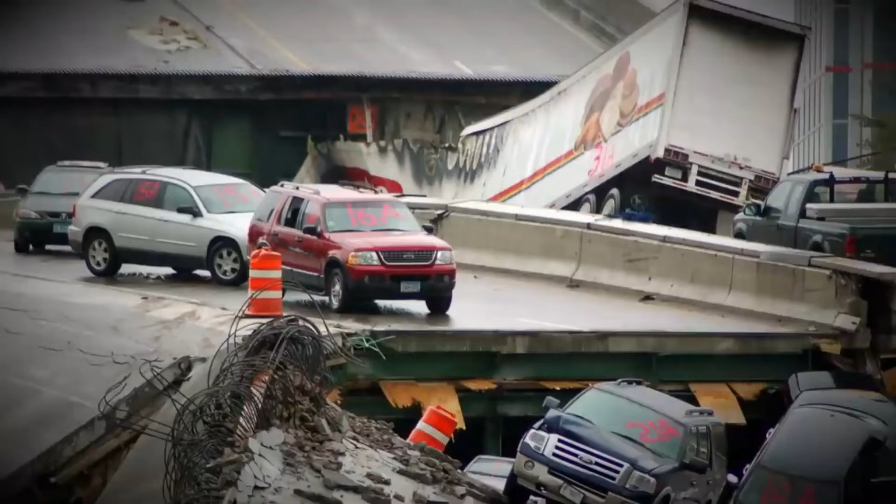Today we're covering the Mississippi Bridge collapse, and as such I'm going to rate it here 6 on my disaster scale, and again here 6 on my historical legacy scale.

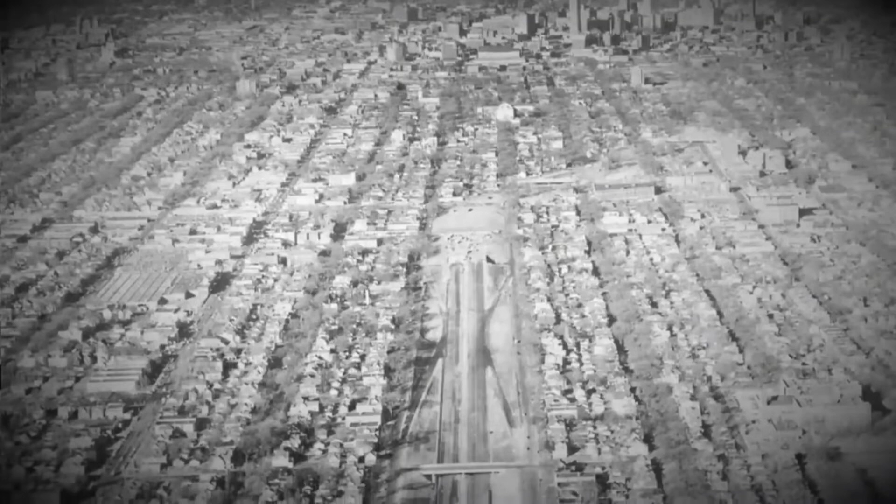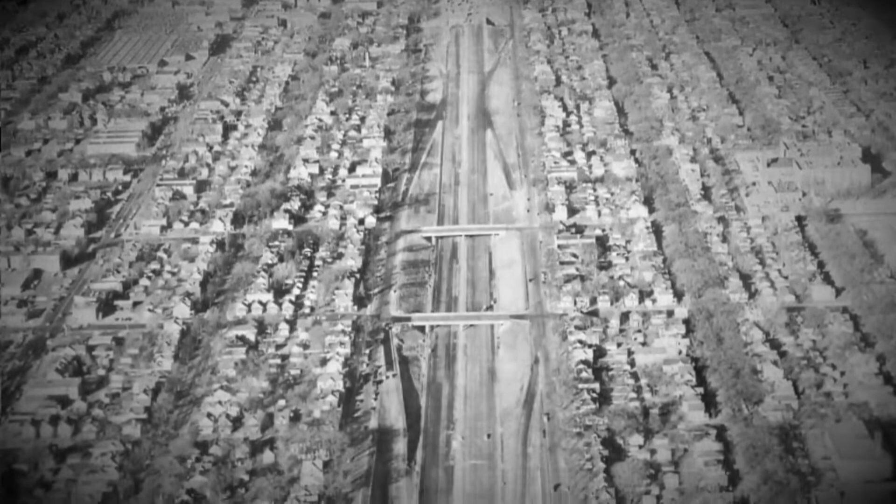In the early 1960s, plans were drawn up to cross the Mississippi River as part of the colossal construction of the I-35, a monumental 1,569-mile north-south cross-country interstate highway project. Parts of what would become the I-35 had been constructed pre-1956, the date on which the interstate system was formed

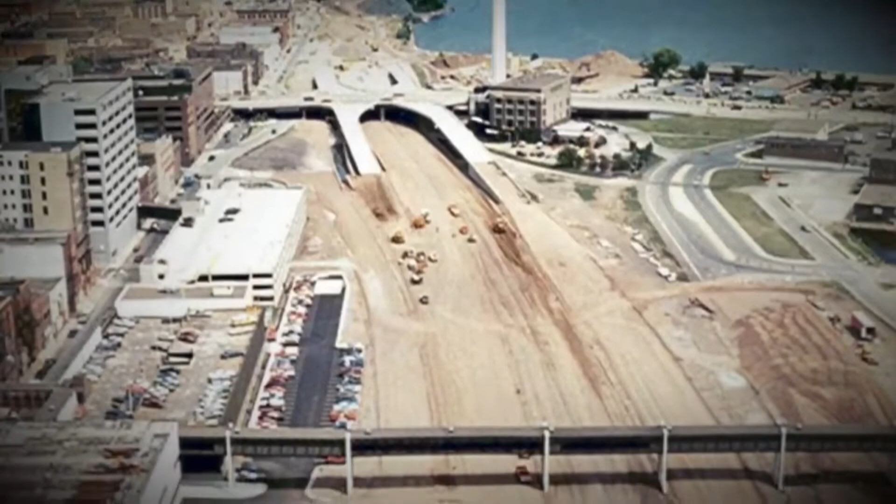in the US. The route would eventually be completed in 1982, and it ran from Minnesota in the north all the way down to Texas in the south. And part of the route would have to travel through Minneapolis, necessitating the crossing of the Mississippi River.

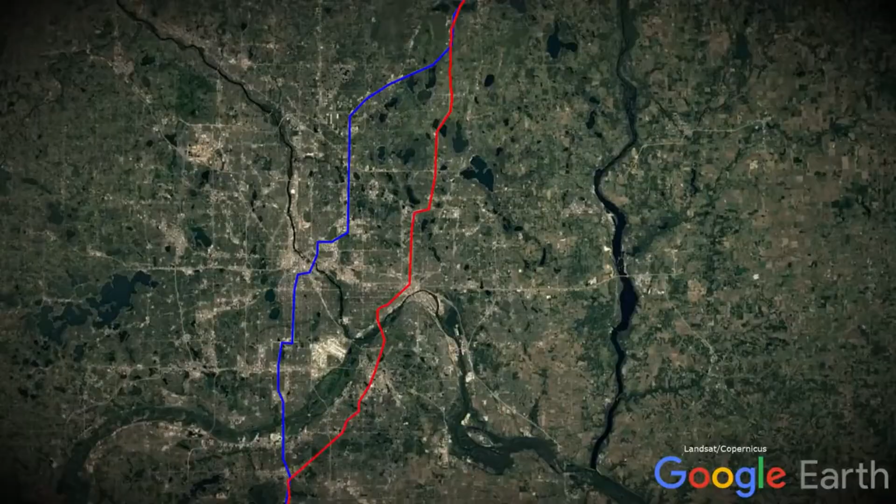As a side, the I-35 in the region actually splits into 2, the I-35 West and the I-35 East. This allowed the highway to be brought into Minneapolis and St. Paul respectively. Both branches rejoined in Columbus. In 1962, plans were begun to be put on paper on the I-35 West River crossing.

As part of the design process, engineering firm Sverdrup and Parcel were hired on to produce a preliminary engineering report, create final design plans, checked by a registered professional engineer, and check design computations. On the 12th of April 1963, 2 options were presented to the Minnesota Department of Transport, a 4 and a 3 truss design. Sverdrup and Parcel recommended the latter for economic reasons, which was the option selected by the department.

The accompanying report from Sverdrup and Parcel stated welding is planned throughout for the makeup of girders and truss members, and in this connection, high yield strength steel conforming to T1 will be used extensively. They also commented that the use of welding compared to riveting would save the department money, but in reality the use of T1 steel had an overall cost implication.

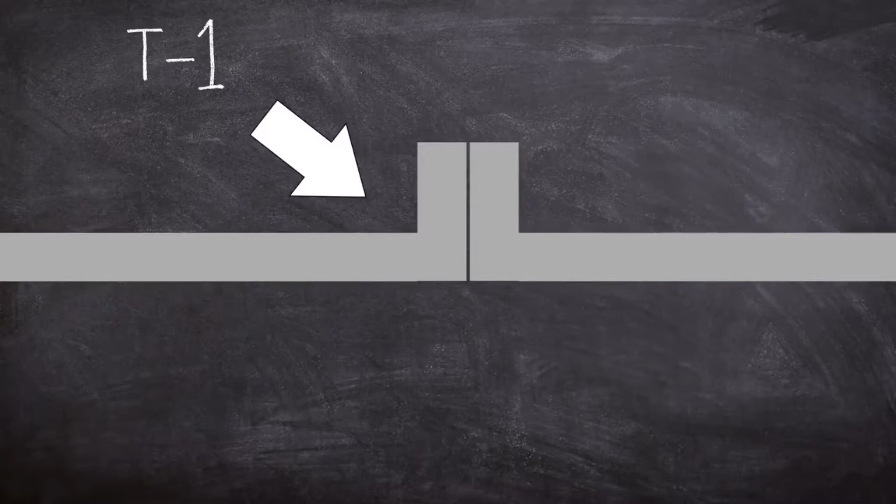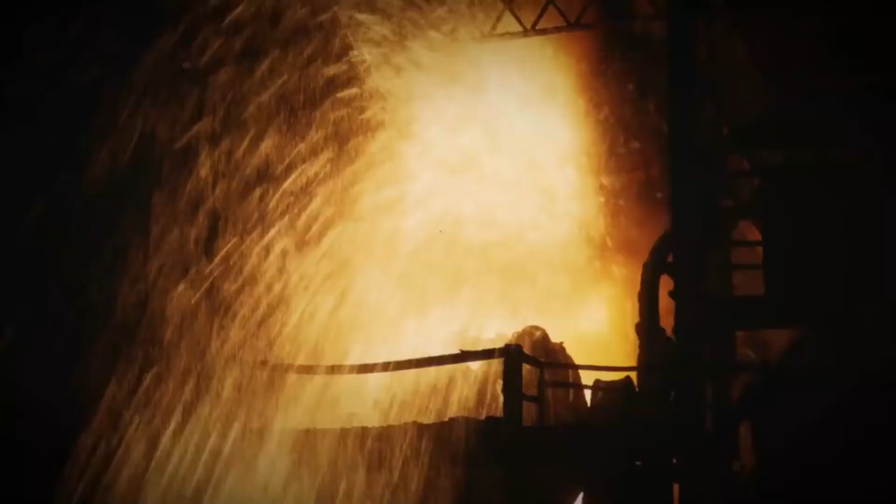By September, both Minnesota Department of Transport and the Federal Highways Administration began to express reservations about using such large quantities of T1 steel in the bridge. You see, T1 is a very strong construction material, but this comes with a drawback: the way it is heat treated. And as such, members made of T1 are limited by the size of the heat treatment facilities where they are produced. This meant that there would be a need for more joints, which incurred extra cost during construction.

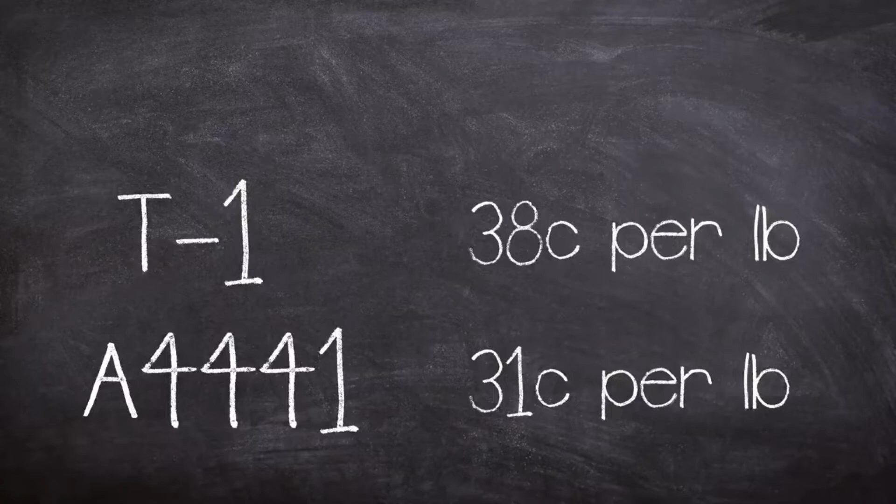Not only that, but the material was more expensive compared to other steel types at the time. T1 was 38 cents per pound, compared to the weaker A441 steel that was around 31 cents per pound, and could be made in longer sections due to the different heat treatment processes.

During the March 1964 conference, Minnesota Department of Transport and the Federal Highways Administration decided that Sverdrup and Parcel eliminate T1 steel from all main truss members and use A441 and A242 steels instead. This required a redesign, as the A441 and A242 steel had a capacity of 27,000 pounds per square inch versus 45,000 pounds per square inch for T1.

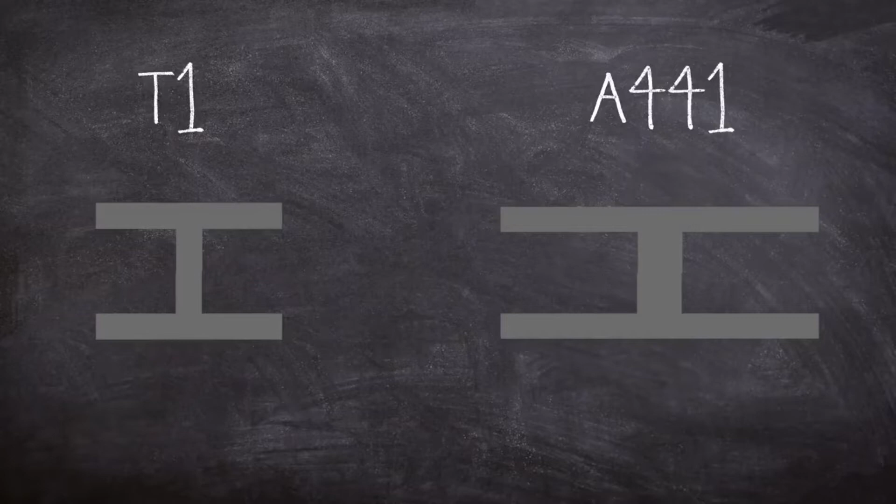Due to the weaker steel, the design had to be replanned and required thicker steel, which in turn added more deadweight to the structure. However, some of the original 0.5-inch T1 steel gussets weren't thickened when the change to weaker steel was employed. The ones that were improved in the final design were up to 1 inch thick, and it might be worthwhile remembering this for later on.

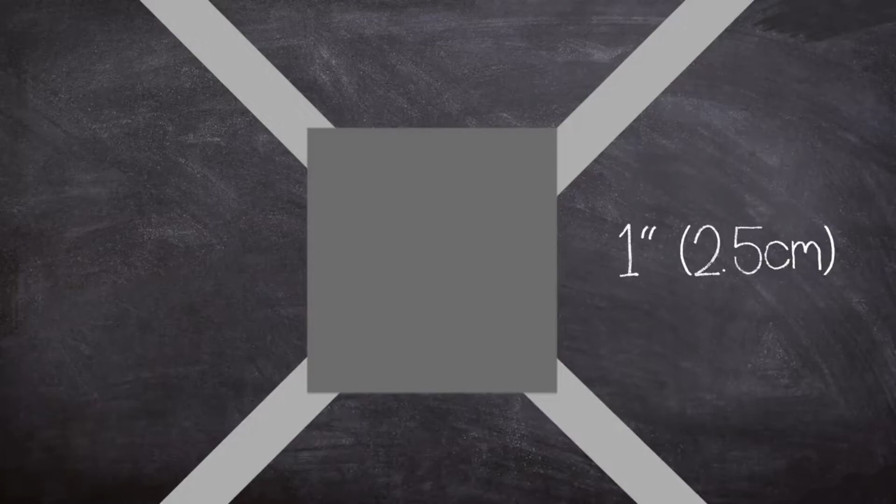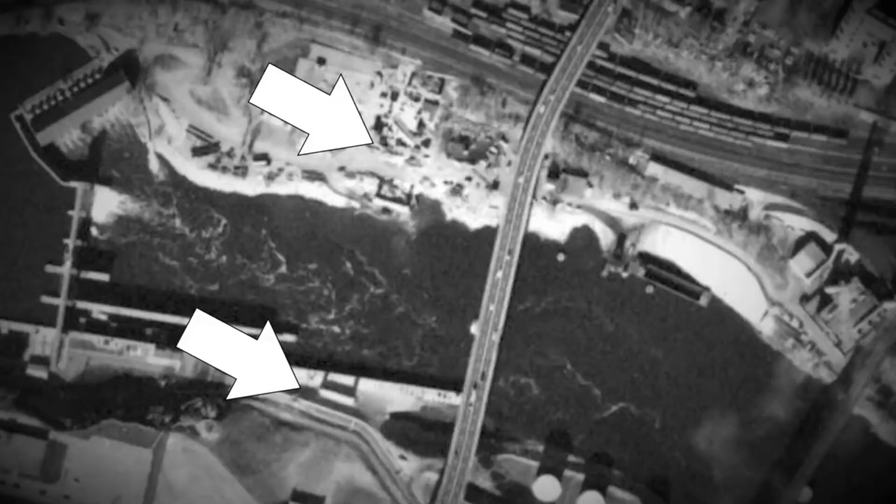The final design was settled upon by March 1965. However, initial works to build the piers had already started in 1964. Let's first look at the actual design accepted. The structure used welded built-up steel beams for girders and truss members, with riveted and bolted connections.

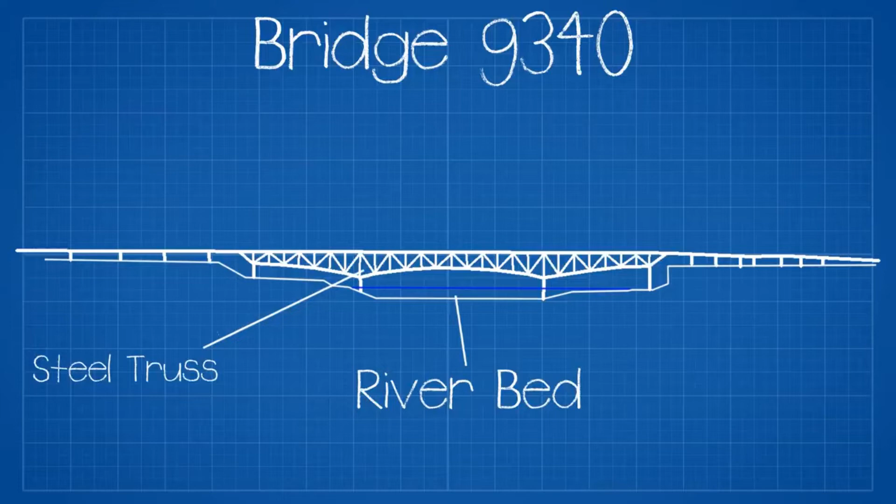The bridge was 1,907 feet long and carried 8 lanes of traffic, 4 northbound and 4 southbound. The bridge had 13 reinforced concrete piers and 14 spans, numbered south to north. 11 of the 14 spans were approach spans to the deck truss portion, which was only 3 spans long but was over 1,000 feet in length.

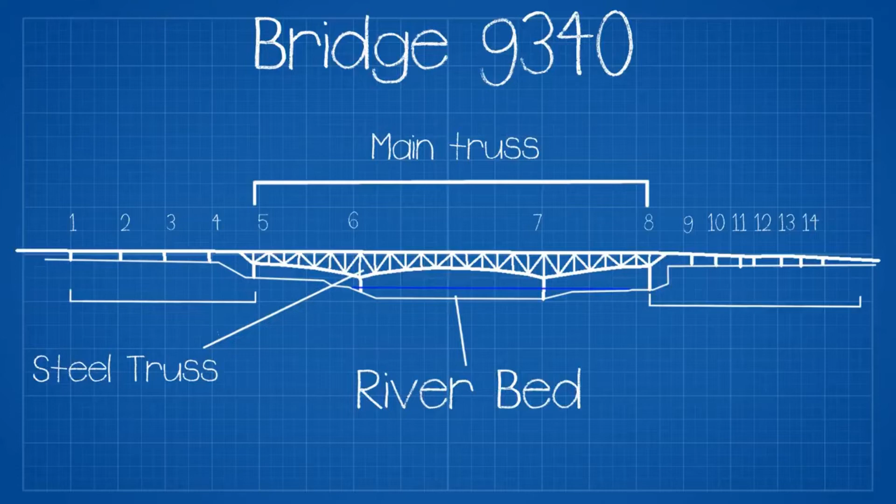The bridge deck in the approach spans was supported by continuous welded steel plate girders or by continuous voided slab construction. The 3 main spans used deck truss construction, consisting of 2 reinforced concrete deck slabs separated by about 6 inches, with a total width of the deck slabs of about 113 feet 4 inches. This was enough to accommodate all 8 lanes of traffic.

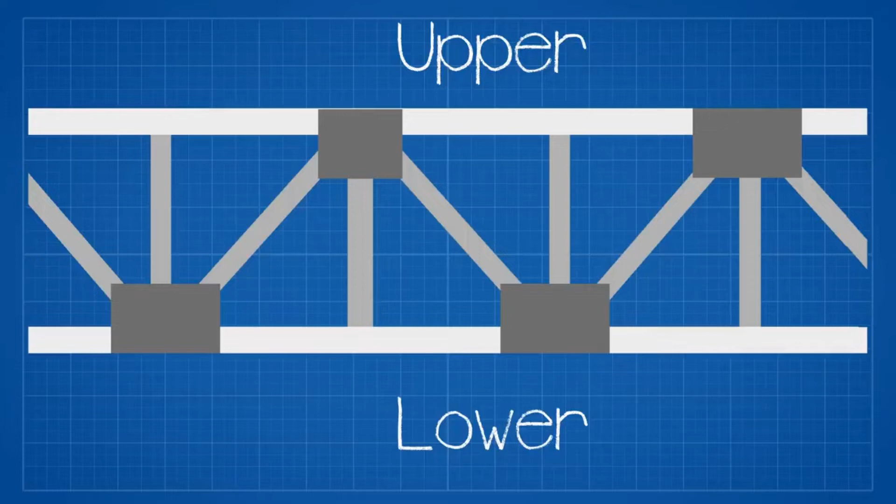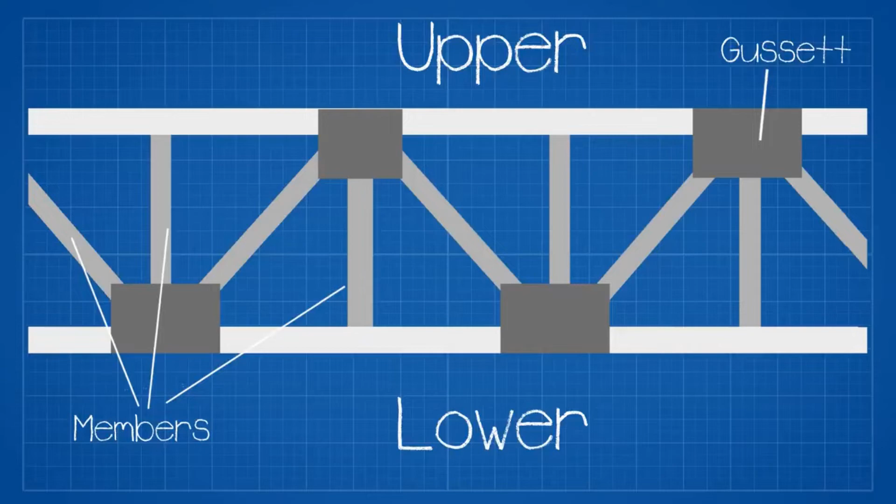The main trusses comprised 2 parallel main sections. This was made up of upper and lower chords that extended the length of the deck truss portion of the bridge. For added strength, the chords were connected by straight, vertical and diagonal members. To connect these together at each junction, gusset plates were installed and riveted together. These were made of steel. To connect the east and west trusses, bracing members were utilised.

Construction was completed in 1967 and opened to traffic, and for 10 years or so all seemed well, until it reached its first renovation in 1977. Back in 1967, when the bridge was initially constructed, it had 1.5 inches of concrete over the uncoated top reinforcing bars of the bridge deck. This was pretty standard for the time, but by the 1970s a number of similar structures were experiencing rebar corrosion.

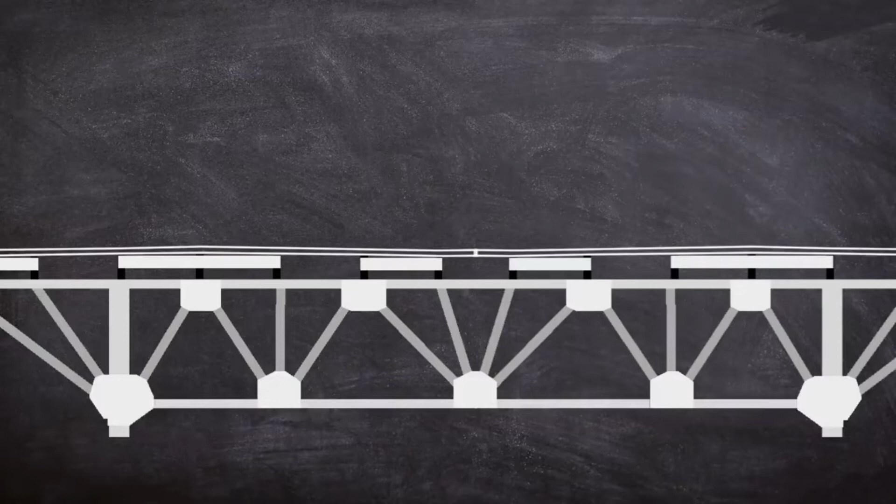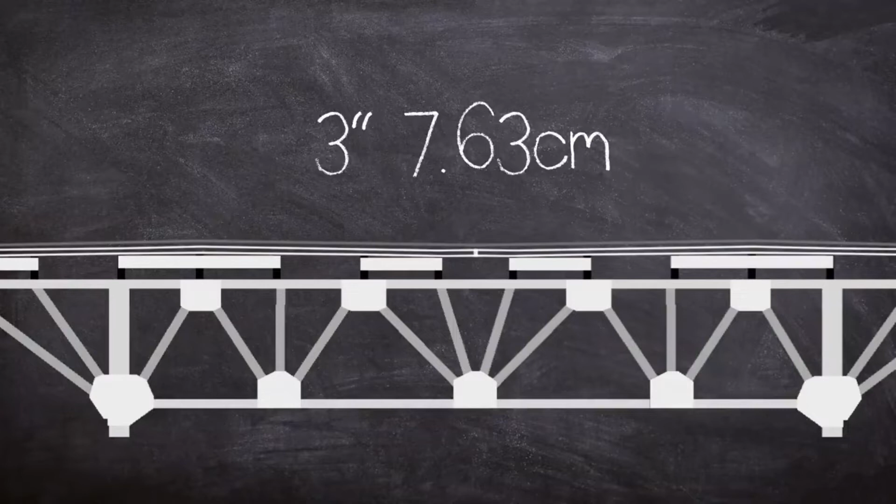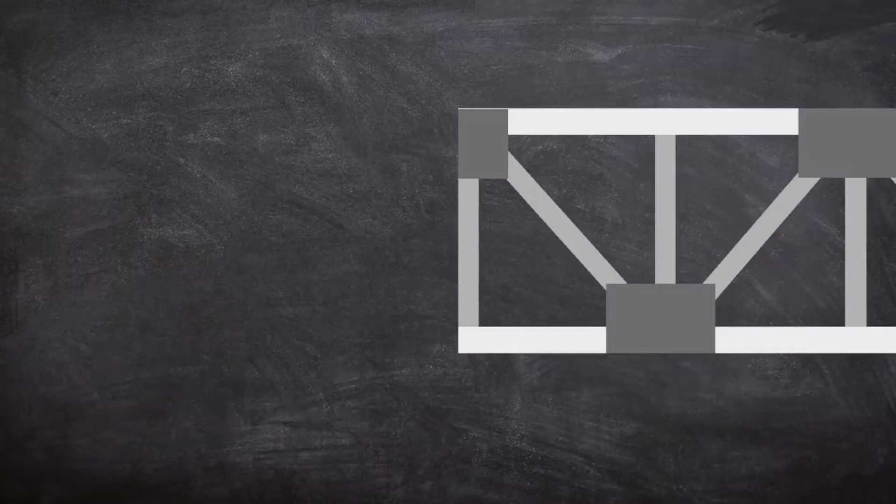In order to combat this, a thicker layer of concrete was poured on top of the bridge, bringing the total thickness to 3 inches. But this came with an issue, and that was the increase in weight on the truss structure, in the region of roughly 3 million pounds or 13.4%. All throughout the bridge's life, the structure received an annual inspection, starting in 1971. Part of these inspections were a general condition and evaluation report, but after 1991 the results took a nosedive.

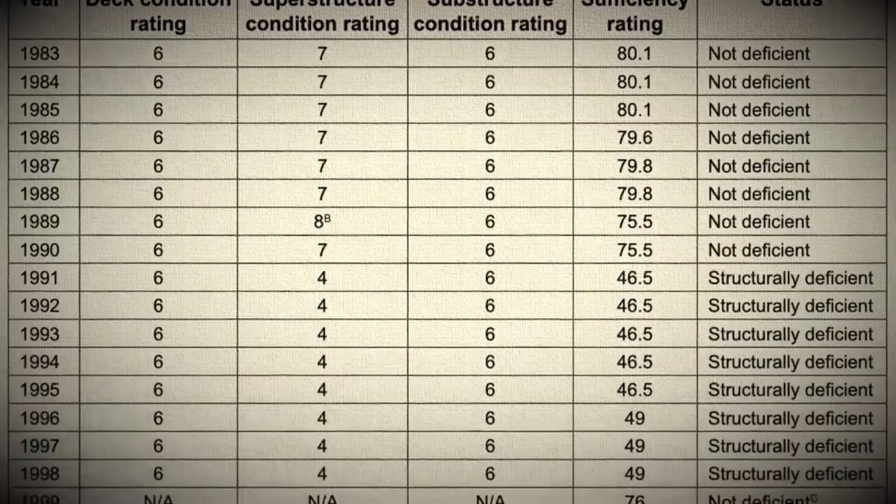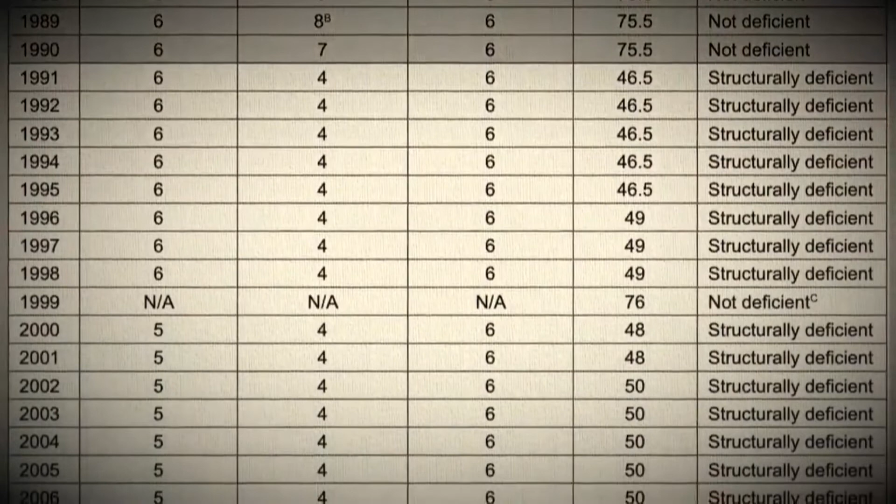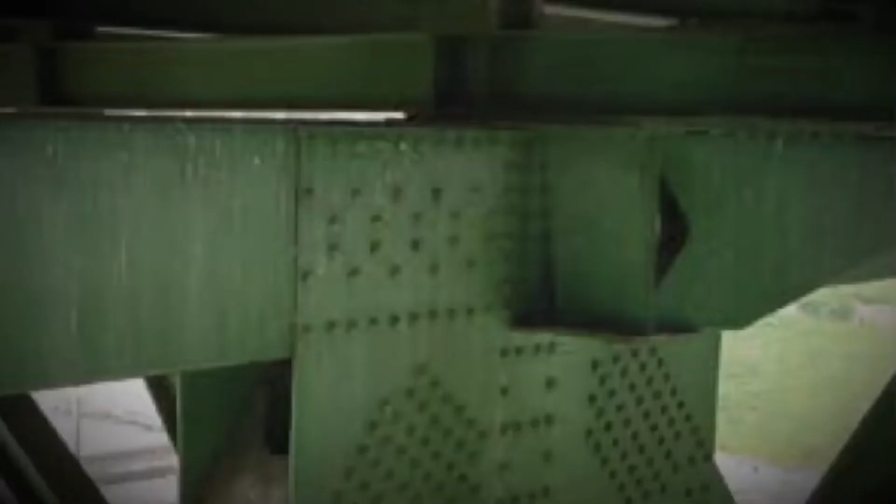As part of the annual survey, the bridge is given a status, and at the start of the 1990s it received an unsatisfactory structural deficiency rating. A status does not indicate that a bridge is unsafe, but only that the structure is in need of maintenance, repair or eventual rehabilitation, and as such a weight restriction is given. However, in 1993 some gusset plates had experienced corrosion.

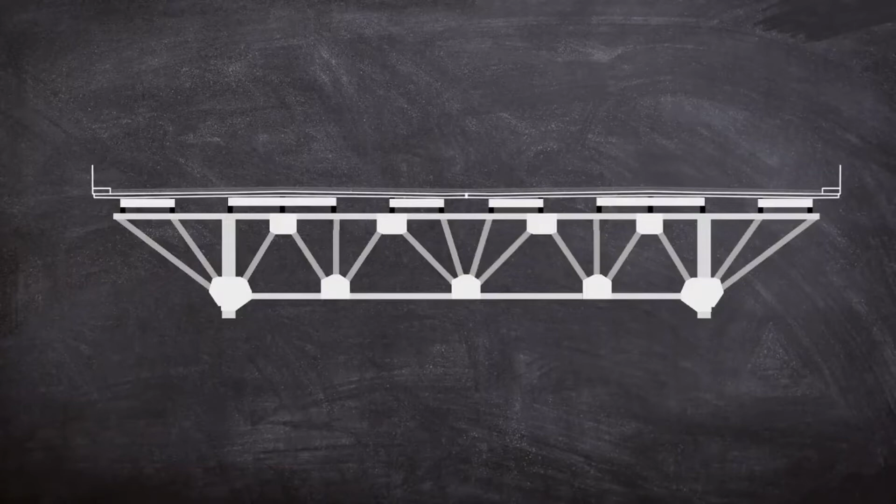In 1998 another refurbishment project was underway at the bridge. This involved improving several features, including the central barrier and outside traffic railings, which did not meet the then-current safety standards. And like in 1977, the permanent changes increased the dead load on the bridge by about 1.13 million pounds, or 6.1%. In the early 2000s, cracking was discovered and was drilled out and reinforced, and a process of 6-monthly inspections was enacted.

And this brings us to the bridge's final renovation, leading to 4 of the 8 lanes being closed on the I-35W bridge. The 2007 renovation involved removing some of the concrete and adding a 2-inch thick concrete overlay on the deck. Part of the construction works involved staging materials on the bridge, ready for use. This increased the static load by roughly 578,000 pounds, right over one of the 0.5-inch thin gusset plates.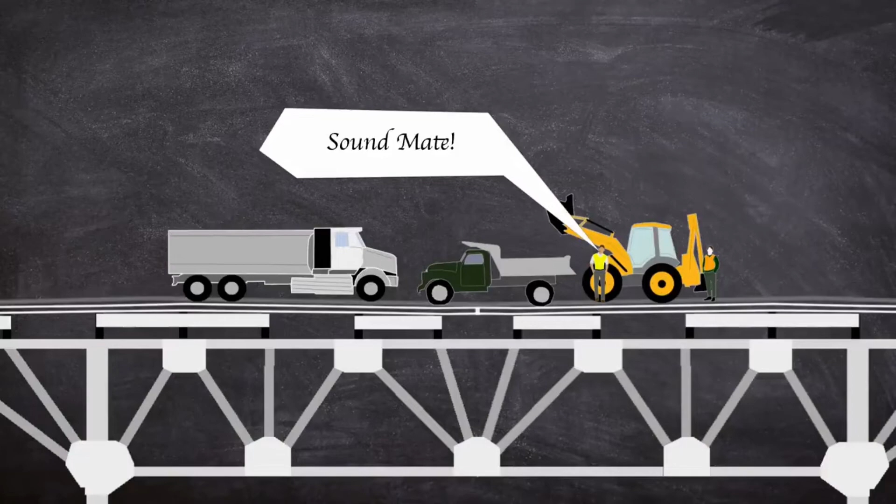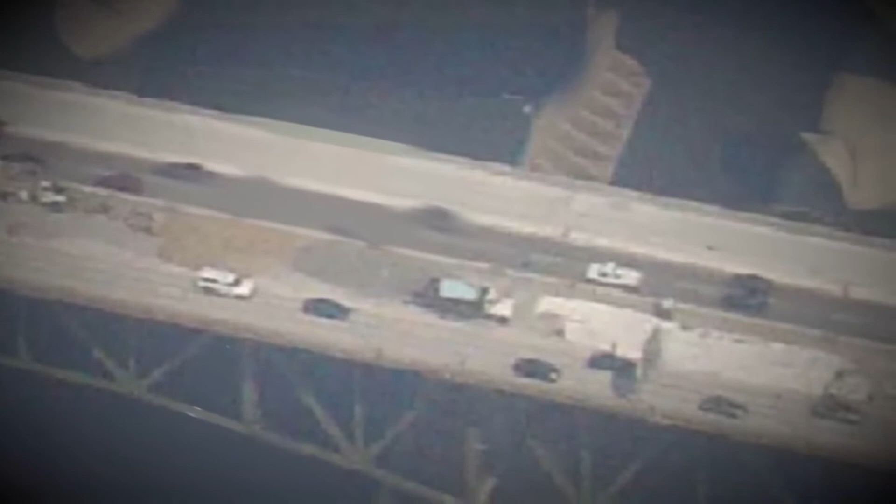During the works, throughout July, the staging of materials was not raised as a concern, and as such, for each surface pour, tons of sand, rock and water were stored right over some of the most vulnerable portions of the bridge. On the afternoon of August the 1st, 2007, the contractors working on the bridge were preparing to pour a 530-foot overlay in the southbound inside lanes. The pour was set to be undertaken at 7 p.m.

due to the hot summer sunshine, and in lead up to this, large numbers of materials were stored on the bridge, and 2 cement tankers were fully loaded at 80,000 pounds and were parked over Pier 6 and the weakened gusset plates. To add more weight to the bridge from the concrete pour, the busy evening rush hour traffic crawled its way over the open lanes, further concentrating the weight on the structure.

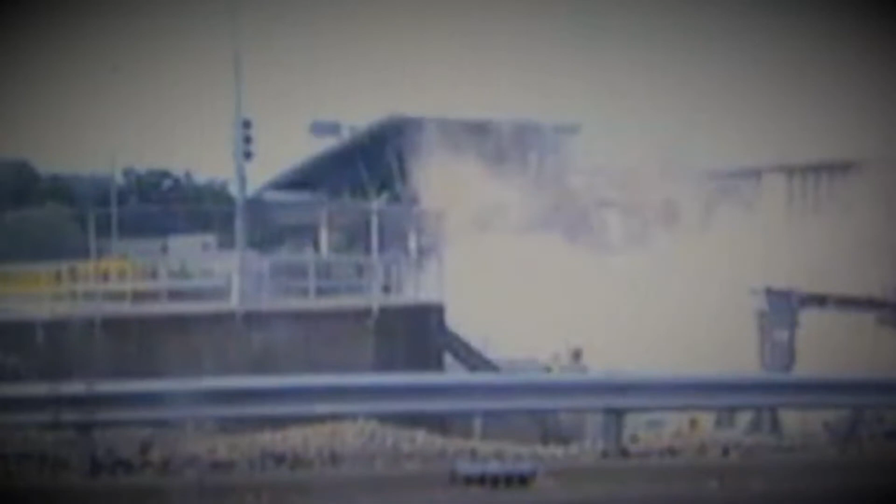The inevitable would happen at 6:05 p.m. The central span of the bridge suddenly gave way, followed by the next spans. The structure and deck collapsed into the river and onto the riverbanks below. There was a motion control security camera, and this captured the dramatic and fatal moment of the structure's failure. There were 111 vehicles on the bridge when it collapsed, and this included public as well as personal vehicles. Many were plunged into the river, the banks, and the rail yard below the span of the bridge.

The first call from 911 dispatch went out at 6:07 p.m. and at 6:08 p.m. Minneapolis 911 dispatch made a distress call requesting that all available emergency assistance personnel attend the scene. Many of the first people involved on the scene were locals and others stuck in traffic. Just 5 minutes after the collapse, police were on scene and began to coordinate the rescue efforts. Within an hour of the collapse, 12 public safety agencies responded with 28 watercraft to assist with the river rescue operations, helping to recover many victims from the Mississippi River.

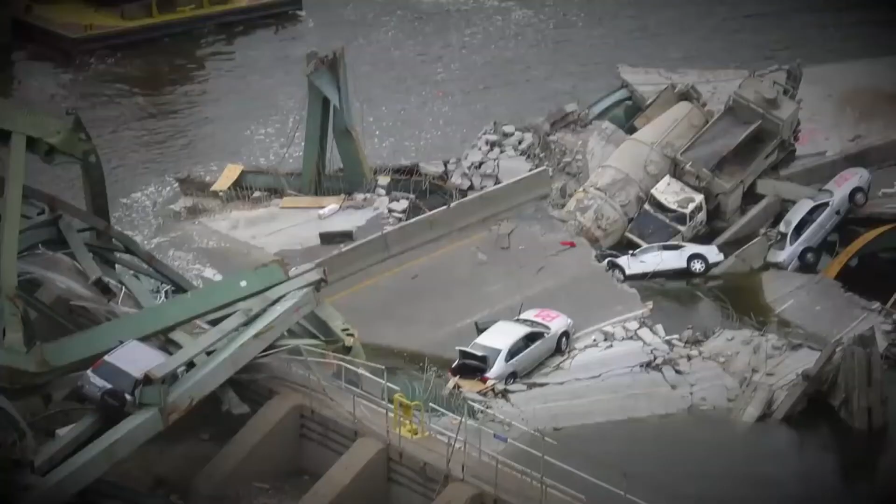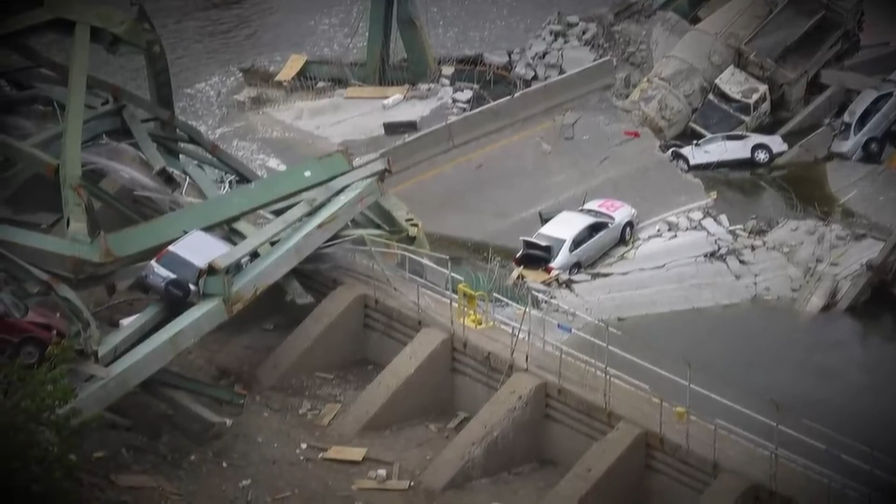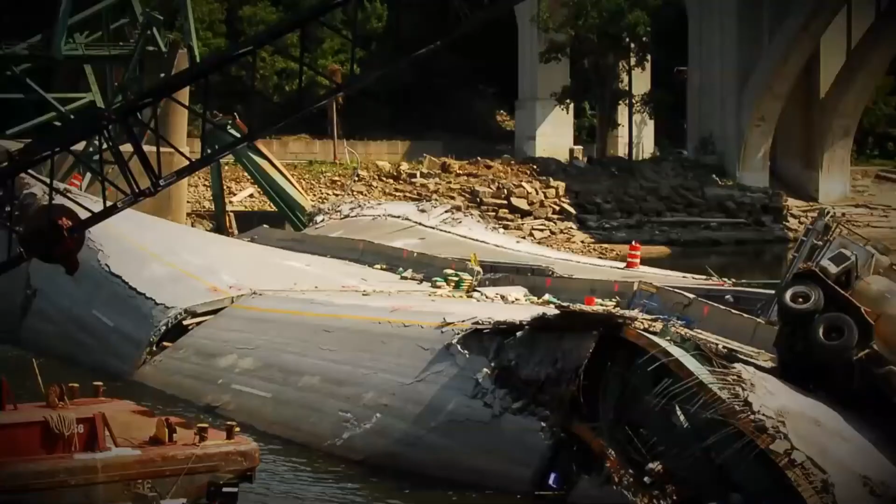Some sections of the roadway were resting on top of the river, leading to the occupants of some of the vehicles being stranded, necessitating 93 being rescued from various precarious situations. In the summer evening, many lined the banks of the river to watch the unfolding dramatic rescue efforts launched by the first responders. By 7 p.m., the rescue efforts started to move towards search and recovery as the submerged vehicles needed to be identified. By the next morning, many were still unaccounted for, and as such, the river was lowered by 2 feet by the Ford Dam downstream. It would take 3 weeks for the final body to be removed from the wreckage site. The collapse had a total of 190 casualties, 34 of whom were seriously injured and 13 would be killed.

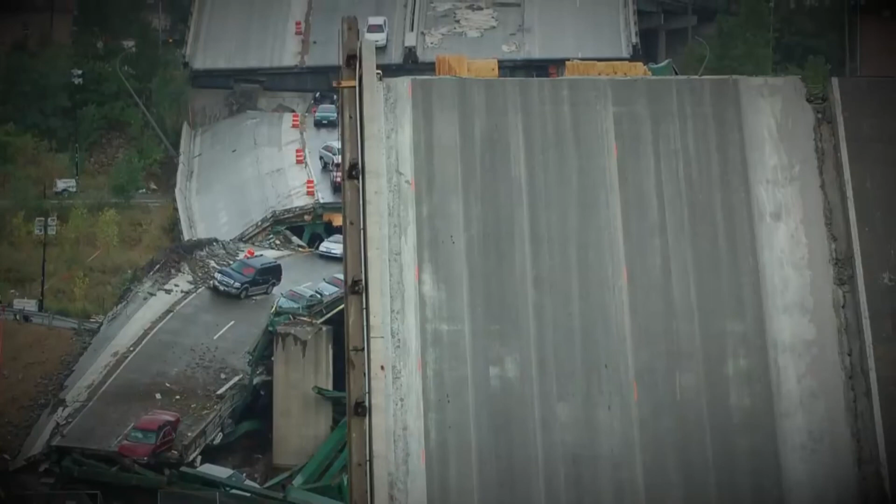On the 6th of August, the United States House of Representatives and the United States Senate each voted unanimously to secure $250 million in emergency funding for the state of Minnesota. With traffic now rerouted away from the bridge site, many dead and millions of dollars worth of damage, the NTSB set out to find the reason for such a dramatic and sudden structural failure. Every piece of the structure that was recovered underwent scrutiny. Investigators found that gusset plates at the upper node 10 had fractured. The fractured gusset plates, coupled with fractures in the lower chord members between L9 and L10 nodes, resulted in completely separating the main trusses in this area, thereby allowing the centre span to drop.

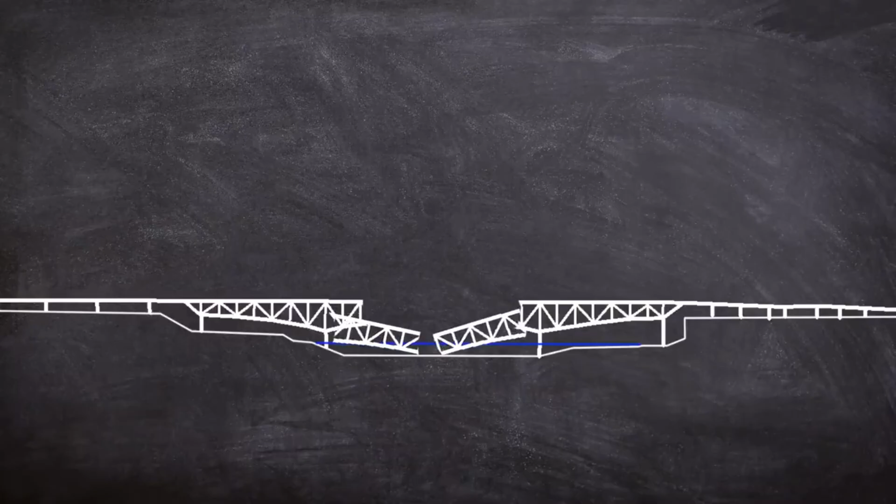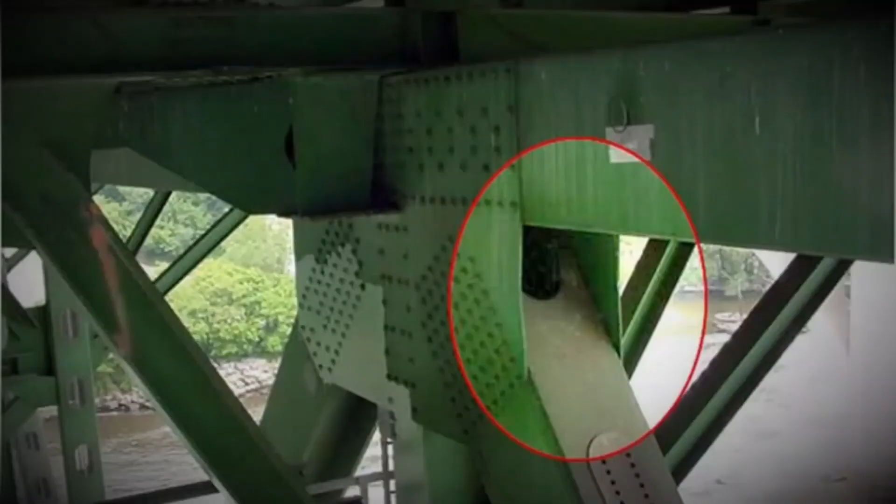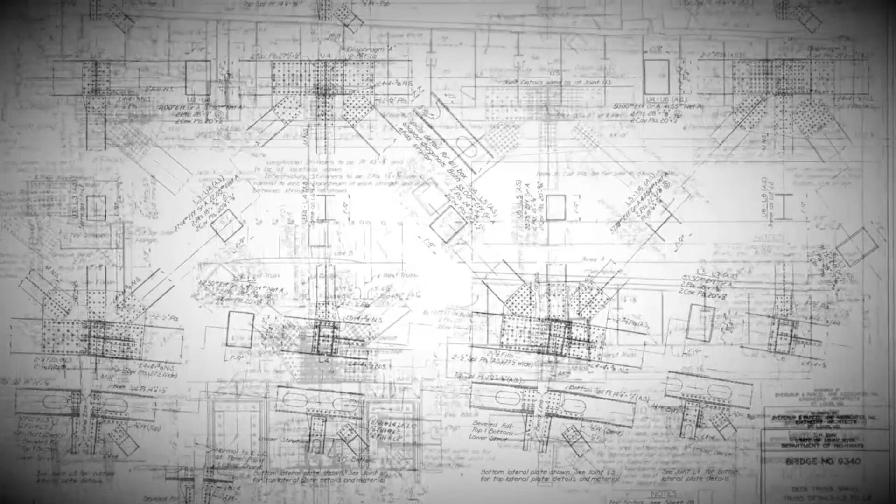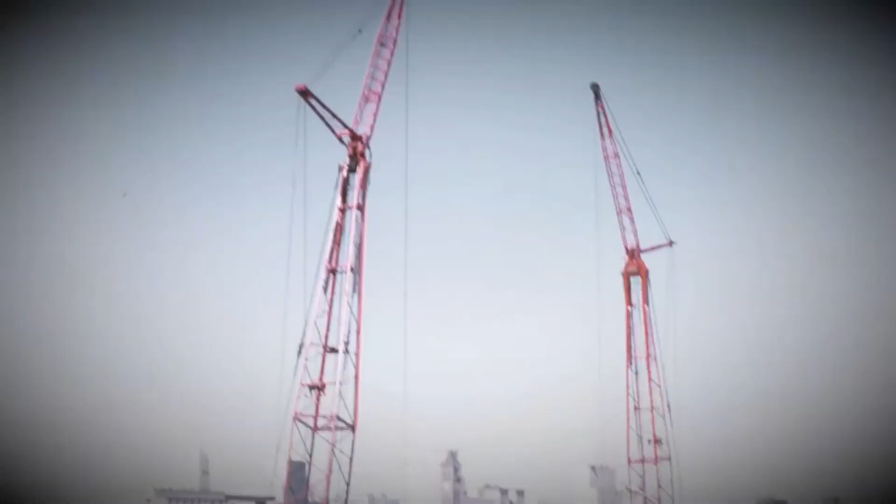Analysis of the security camera footage showed that failure had begun towards the southern end of the centre span, centred on the gusset plates and their material thickness. And the NTSB concluded that some had inadequate capacity for the expected loads on the structure, which was further compounded by the increased weight during the 1977, 1998 and 2007 refurbishments. Ultimately, the NTSB report released in 2008 concluded failure was due to a design error by Sverdrup and Parcel and Associates of the gusset plates at the U10 nodes, which failed under a combination of substantial increases in the weight of the bridge, which resulted from previous bridge modifications. Sverdrup and Parcel received a great deal of blame, along with the state transport officials, for giving inadequate attention to the gusset plates during inspections.

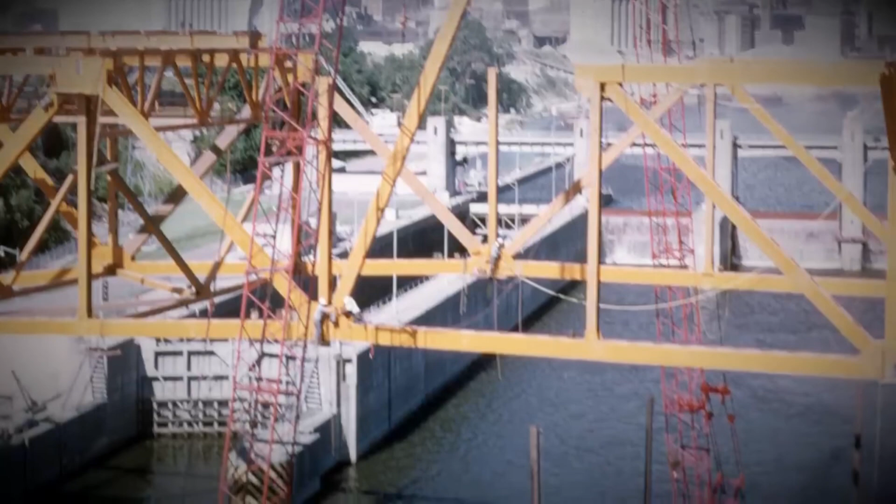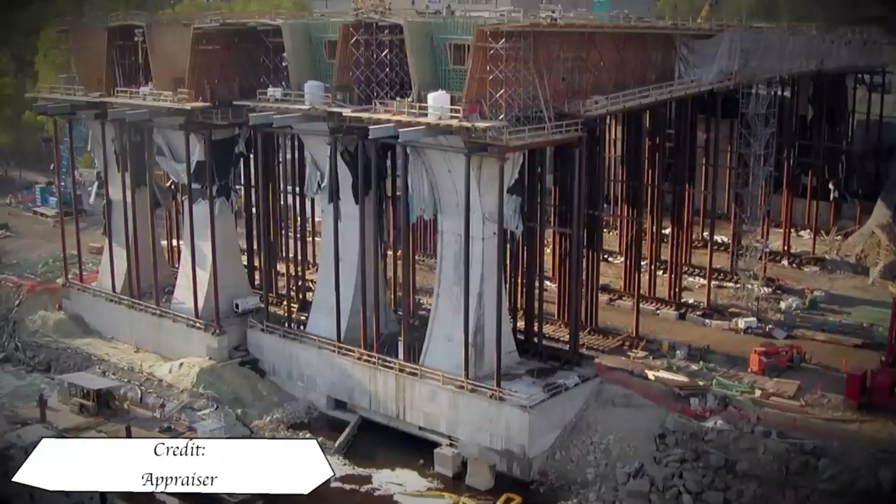Needless to say, the financial implications went beyond the recovery and cleanup for the state. On the 2nd of May 2008, a $38 million agreement to compensate victims of the bridge collapse was settled. Another $52.8 million was received by the victims from URS Corporation and Jacobs Engineering Group, the successor of Sverdrup and Parcel. They also agreed to pay the state $8.9 million in an out-of-court settlement. The bridge would be replaced and opened on the 18th of September 2008.